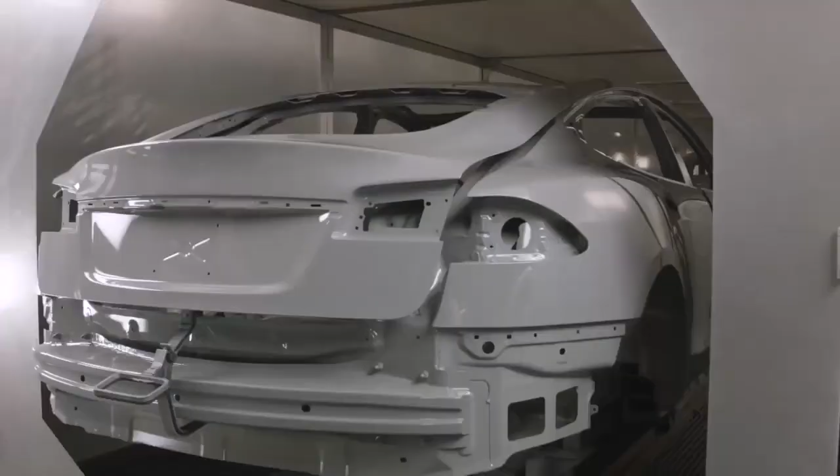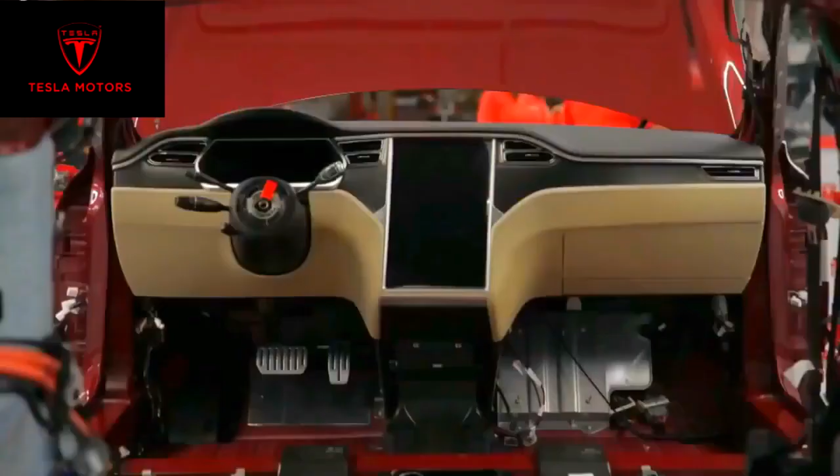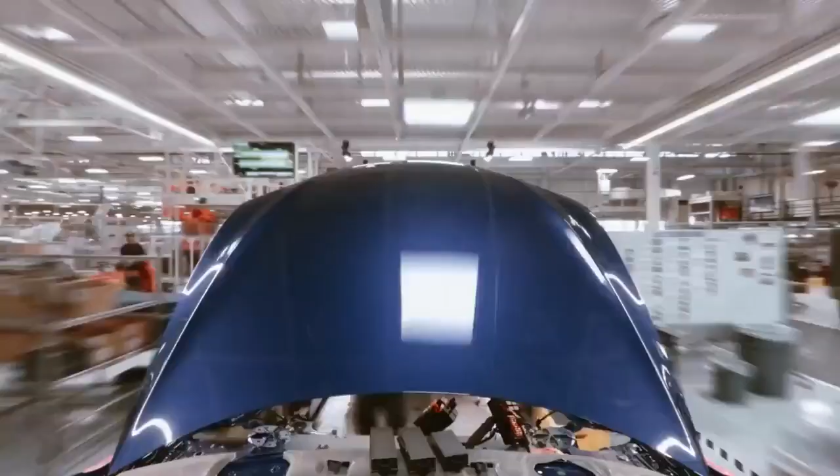Aluminium bodywork, 19-inch alloys, and a $50,000 price tag. At first glance, this car is the latest in a long line of high-end sedans. But that is where the similarities end.

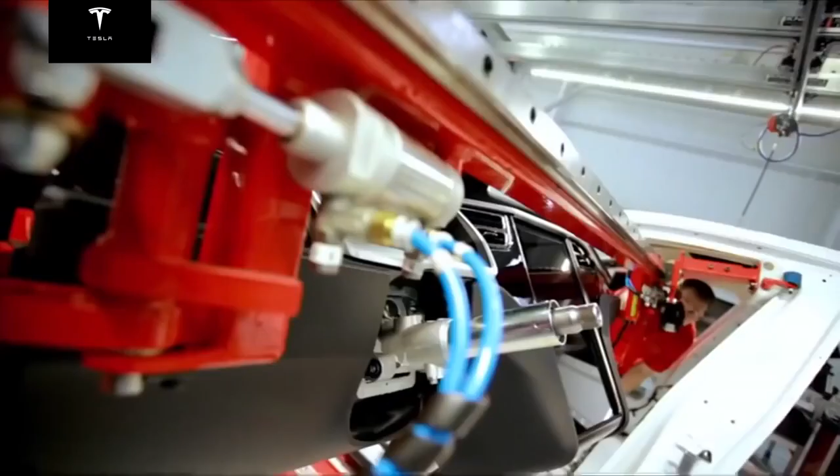The Model S is a totally different type of car. Tesla believe it can lead a revolution and change the face of motoring forever. It's the first ever mass-made premium sedan powered purely by electricity, designed to have speed and range, and not a drop of gas.

Our goal is to create an electric car that is the best car in the world and show that that's what an electric car can be. Tesla's goal is to kill off the combustion engine and prove the electric car has finally come of age. Driving a gasoline car is going to feel like yesterday. Driving this car is driving the future.

This is Elon Musk, Tesla's co-founder and CEO. Elon is an inventor and a maverick entrepreneur, one of America's youngest billionaires. I like exploring, I like technology, I like creating things that have never been seen before or even imagined before. He is a genuine Silicon Valley success story.

In the mid-1990s, Elon set up a small internet company. By 2002, he'd sold PayPal for $1.5 billion. Next, he founded private rocket company SpaceX. It's all part of Elon's life mission.

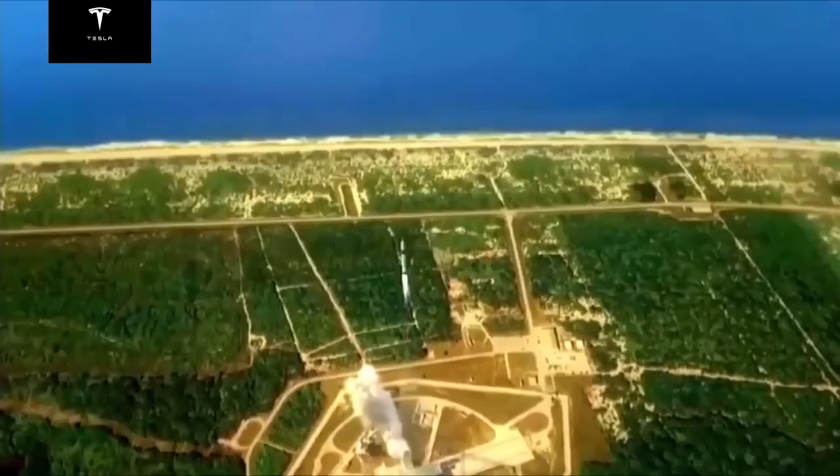When I was in college, I tried to think about, well, what are the areas that would most affect the future of humanity? So the three things were the internet, making life multiplanetary, and the third being sustainable energy. So that's what really ties together my companies, is that sort of thought from 20 years ago.

Tesla Motors is Elon's sustainable energy brainchild. Named after electric power pioneer Nikola Tesla, it's a car company that only makes totally electric vehicles. No hybrid and no alternative fuels. Absolutely no tailpipe. The company estimates their electric cars cause 50% less CO2, even if much of the electricity comes from a coal-powered plant.

It's technology Elon and co-founder J.B. Straubel believe we need. We're solving problems for our children, our grandchildren. Oil is a finite resource, and eventually we have to find alternatives. When you take that oil out of the ground and you burn it, it's extremely dangerous. We should not play Russian roulette with the atmosphere. We only got one.

Tesla's founders have a vision of a world without gasoline cars. They are convinced electric is not only cleaner, but better. Now, they want to prove it to the world. They believe their cars can trigger a transport revolution and bring electric motoring to the masses. What we're doing here at Tesla can have an amazing impact and revolutionize the auto industry and make every car on the road electric. That's our end goal.

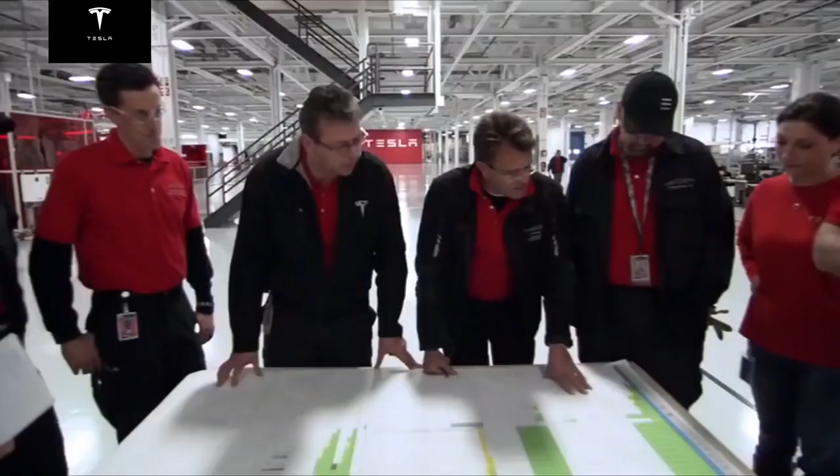Elon brings in Gilbert Passin as head of manufacturing. Gilbert is an expert from one of Toyota's award-winning plants in Canada. His description of my job to me was very simple. You know, you've got to create the best factory in the world with the best people in the world and make the best premium car sedan. And I said, okay, so where's the factory? Well, you have to find one. Where's the team? Well, you have to make one.

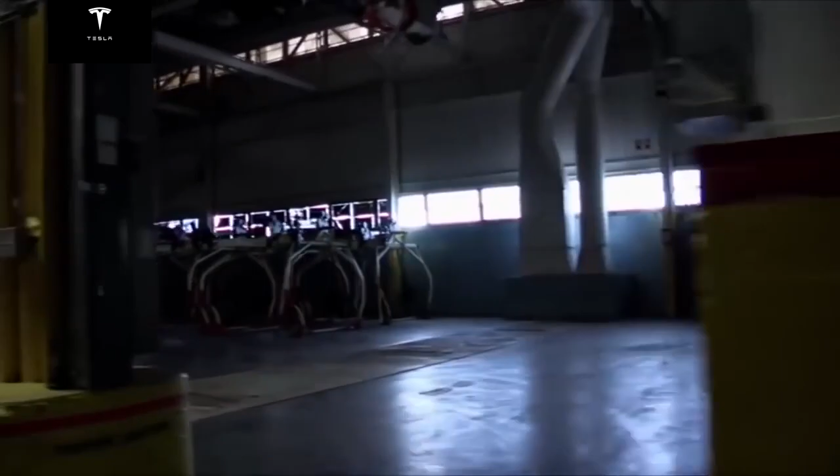The company purchased a former GM and Toyota site in Fremont, California, on the edge of Silicon Valley. The abandoned facility is a traditional car factory. Dark, little natural light, bare concrete floors. When Tesla Motors move in, it's the birth of a mega factory like no other.

It's a totally fresh approach to car manufacture. The walls and floors are painted white. The machinery a striking red. Skylights and windows flood the factory with sunlight. If you make the factory pristine and clean, that sets the tone for the vehicle. We want that same sense of quality and precision in the car itself.

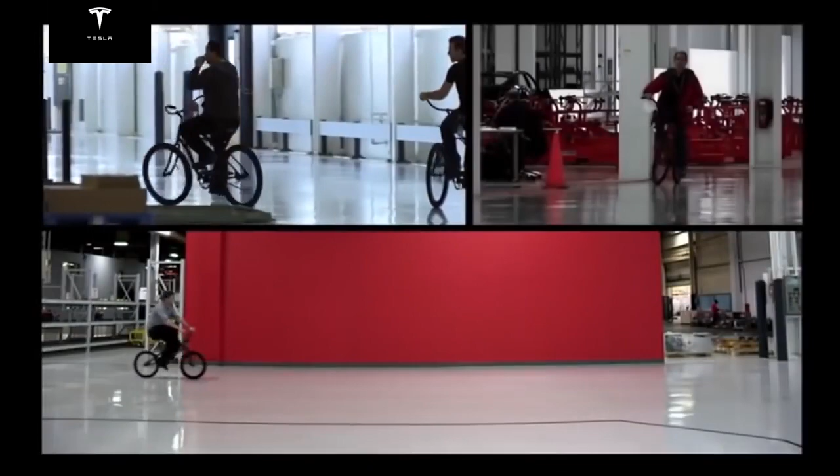As part of the whole company ethos, bikes are provided so the workers can get around the factory. I think it's important to have an environment where people look forward to coming to work. So it's worth putting some effort into making the factory beautiful. In true Silicon Valley style, they fill the space with the most advanced technology, creating an automated production line capable of building tens of thousands of cars.

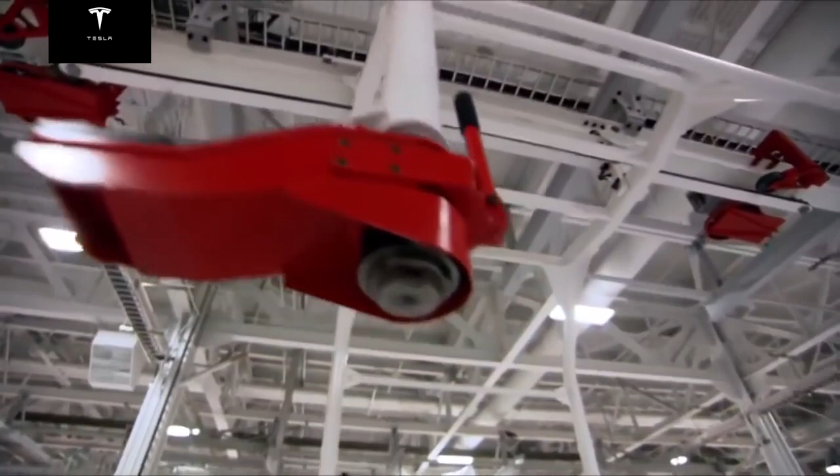Super efficient multitasking robots, self-guided smart carts, and computerized production schedulers. The factory is designed to be up there with the very best in the world. We love engineering, we love beautiful machines, we love new technology, we love to innovate with high technology. And also in manufacturing, we love to do that.

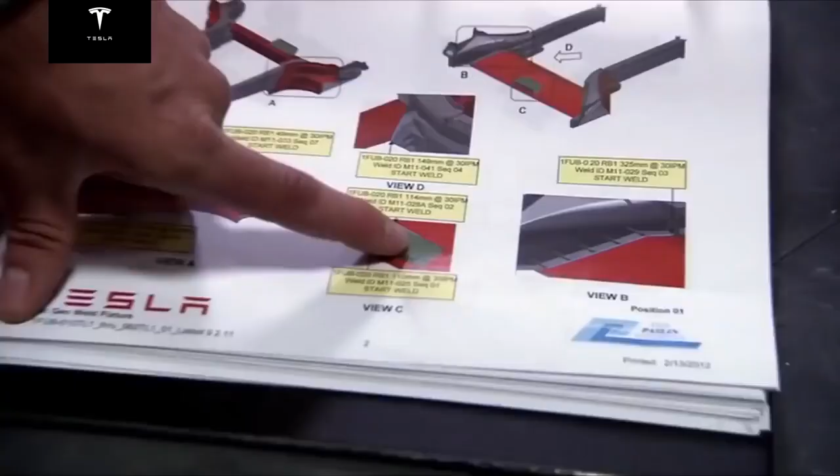Without training, these sophisticated robots are useless. They all need to be taught before they can run tasks automatically. Every robot is programmed by hand. The Tesla team has meticulously trained 130 sophisticated robots over a year and a half. One of the last robots still to be programmed is a multi-point welding robot. It will be used to join the car's underbody. These are pretty busy robots, so we got to make sure that our takt time is good.

A robot's work is only as good as the man who trains it. Brad Johnson is a welder with over 25 years' experience at the highest level. Getting this done today, we'll have the teachings all nice and smooth, and then we can start running 100% and full automatic. That sounds good. The space in which the robot operates is treated as a three-dimensional grid. The head can be manually guided to any point using a teach pendant.

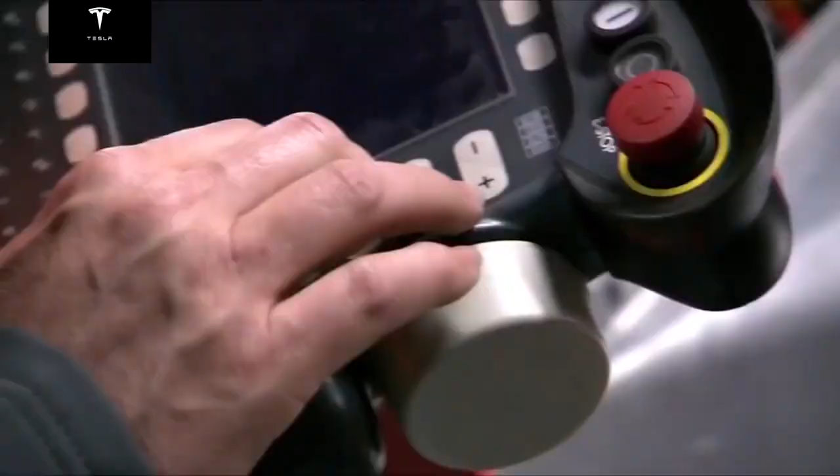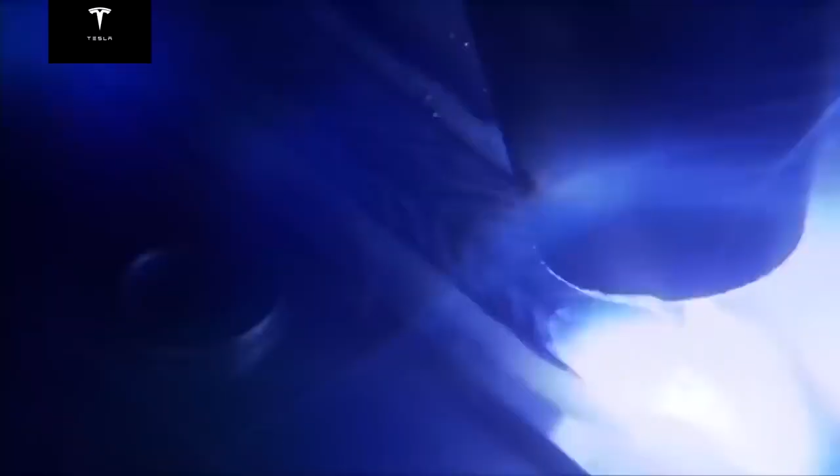There's our start point and our weld position. Brad guides the robot millimeter by millimeter and uploads the coordinates. The robot works out the most efficient route and runs the program. Looks like the teaching is right on mark, and we have a really good quality weld right here. So we should be able to run full auto with this weld. When full production begins, Brad's handiwork will be exactly replicated by the robot 100 times a day.

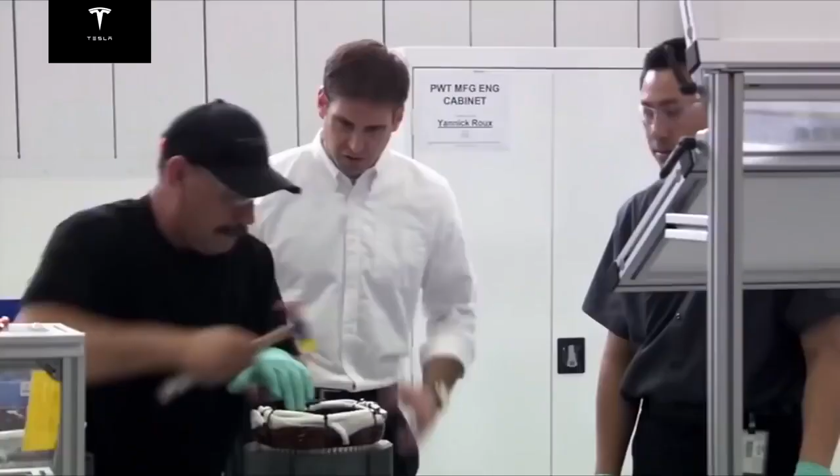Since their inception in 2003, Tesla Motors have been pursuing their electric car revolution with a step-by-step strategy. In an unconventional business move, Elon decreed that Tesla must invest in their reputation first and worry about profit later. Stage 1. Make a small number of high-value cars that prove electric power can be desirable. The Tesla master plan is very simple. We start off creating an expensive, low-volume car to help break the mold in electric vehicles.

Plan in place, they set to work on their first car, basing it around the British-built Lotus Elise. 5 years later, they released the Tesla Roadster. Quicker off the blocks than an Aston Martin Vantage, the electric sports car astonishes the motoring world. Step 1 complete in the Tesla strategy. What we showed was that an electric car could be sexy, it could be fast, and it could be long range. And that if you produce such a car, that people would buy it. But as a $100,000 two-seat sports car, it's a luxury second vehicle to most of its owners.

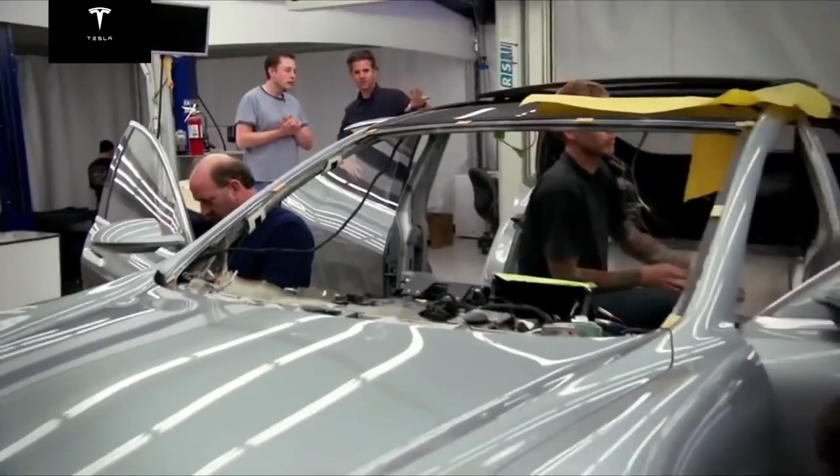Time for the pivotal Stage 2 in the master plan. A car that costs half as much and sells in much bigger numbers. A very important step in the Tesla strategy is really going to show that a mainstream electric car can be better than a gasoline car. The Model S is the second step in Elon Musk's vision of an electric revolution. A premium mass-market sedan designed and built from the ground up by Tesla.

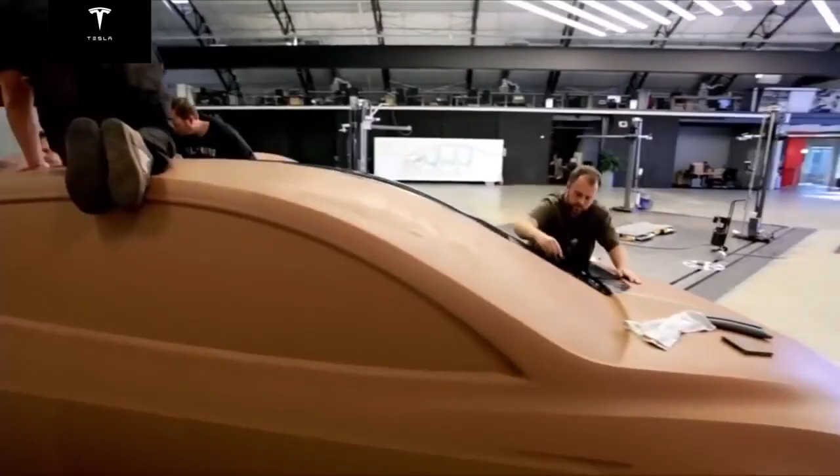At the studio in Los Angeles, they are working to craft that car. The Model S is really the foundation of Tesla. It's the first true product designed, engineered, built, manufactured by Tesla. And it's really the beginning of what our mission is about. Franz von Holzhausen is the chief designer.

He believes Tesla's design needs to have some conventional appeal. It's really easy to have a clean slate and go pretty crazy with that. We had to start with something that people could relate to. If they even knew or cared that it was an electric vehicle, they were attracted to it.

We've stretched the sedan and made it a little bit more modern, but it's still a sedan. It still has this somewhat traditional cue, and so it's easy to love because of that association. Although uniform in appearance, the Model S is a unique car. It was conceived as electric. Even the shape is designed to maximize the battery's range.

The body and the waist here is all slim, so there's no excess fat or body mass on this car. And that's another one of those elements that just translates into great efficiency. This car is one of the most aerodynamic sedans on the market. In an electric car, conserving the battery power is so important. The designers put huge efforts into reducing the drag. Even the door handles are aerodynamic, receding flush into the body.

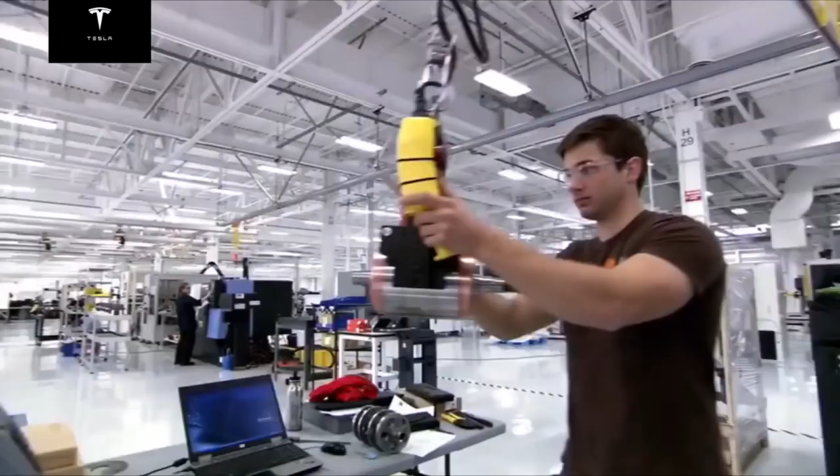But it's the interior that is most heavily influenced by the electric powertrain. The powertrain is incredibly small. You get the same performance out of a motor that's the size of a watermelon that fits between the rear wheels. And everything else above that is what I call the opportunity space. The design team started with the motor and flat battery pack and worked upwards.

With the motor next to the wheels, there's no need for a drive shaft, so there is no rise under the rear middle seat. There is no fuel tank or transmission. The Model S has free space from the floor upwards. What you'll see is a vast amount of space. In fact, it's actually so big that we decided that we could fit 7 people, and we do that by putting 2 rear-facing child seats in the back here. And you can see where they fit here, and their legs go right down in there.

So this is what we call the Frunk, and it's really the trunk in the front of the car. And arguably, you can put a whole bunch of stuff in here, even when the back of the car is totally loaded up with people and kids and stuff. And who doesn't need one of these?

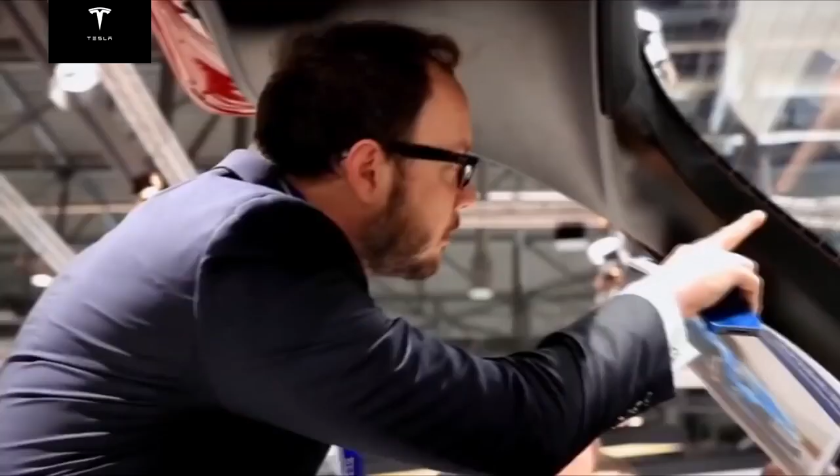The financial boost also creates real pressure. I get harassed quite a bit actually by some people who have reservations, and it's a lot of expectations, very high expectations that we're going to have to meet and exceed, really. Some prepaid customers have been waiting up to 3 years for their car. In return, they've been promised a delivery deadline. I do feel an incredibly strong obligation to those that have placed their faith in Tesla and put down deposits. I'll do anything to make sure that their faith is not misplaced.

The delivery deadline for the first cars is now only 2 months away. But the brand new factory hasn't built a production car yet. If the customers are to get their Model S on time, the facility urgently needs to start manufacturing. The speed at which we have to work here is extremely important to the company's bottom line. This is a kind of timing that is really, really challenging on many, many different accounts.

Tesla need to build 20,000 cars a year. But before mass production can begin, Gilbert and his team must prove the factory is ready. The company is relying on them to get it right. We have to make sure that car after car, the quality is there, everything is perfect along the way. So we are really gearing up towards a production ramp-up. Over the next few weeks, the factory will test manufacture a limited number of Model S.

If the line doesn't perform with these cars, the company will be forced to miss their deadline. Tesla's electric revolution would be over before it started. A very, very important moment is the birth of Model S in our Tesla factory. And it's where the rubber is going to meet the road, so to speak. The process begins in stamping.

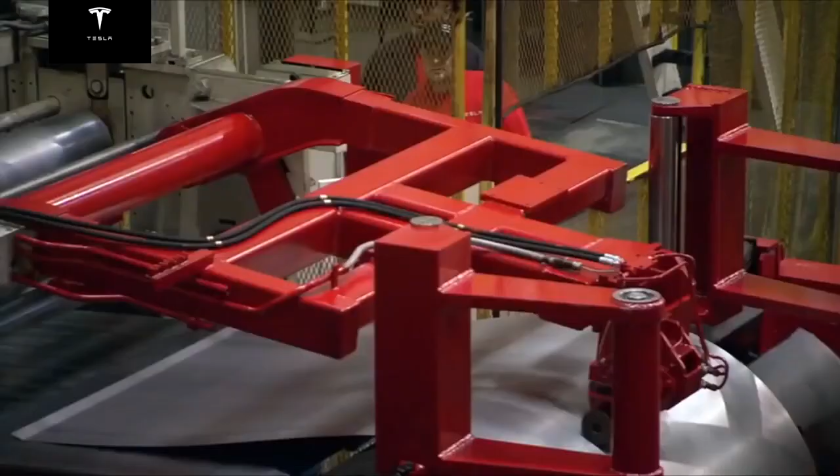To increase the battery's range, the company have decided to build 97% of the Model S with lightweight aluminium. It's an extremely rare feature in a mass production car due to the cost. Every Model S starts as one of these. The roll is loaded into the mechanical cutting machine.

Once cut, the panels are passed to the stamping press. We need to translate flat pieces of aluminum into 3D forms. And how to do this with aluminum stamping with the level of quality that we expect is really, really challenging.

To meet the challenge, they buy the largest available stamping press in North America. It's one of the first pieces of equipment they install. Over 3 stories high, it has to be transported from Detroit on 70 trucks and then entirely rebuilt.

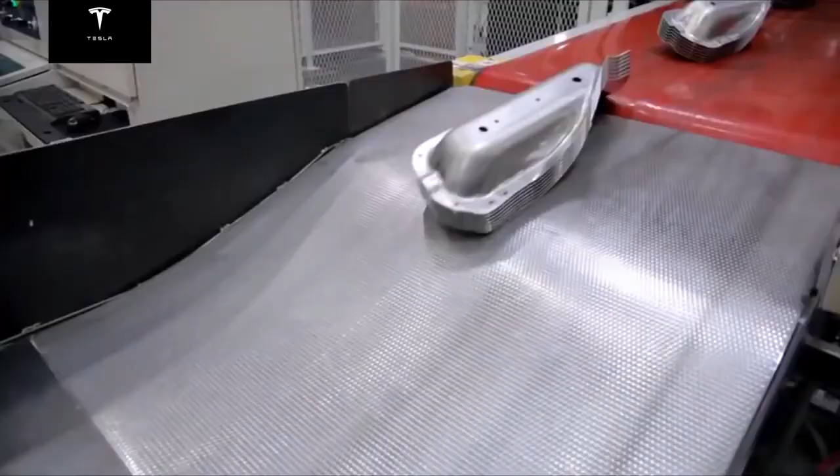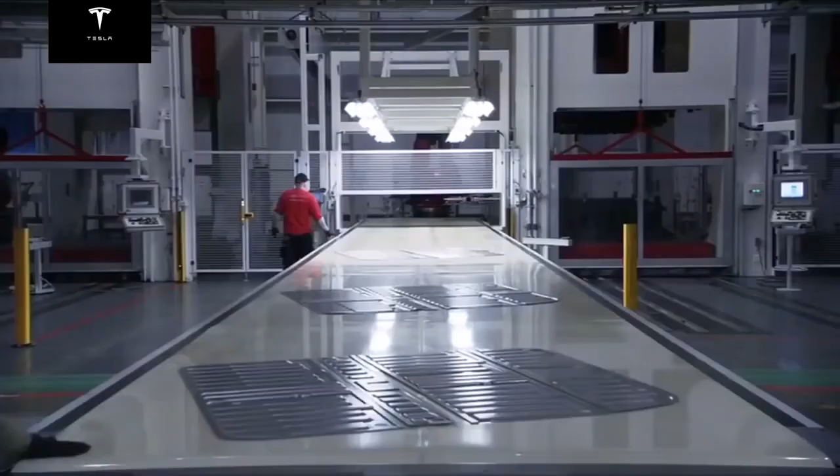The immense pressure from the stamp allows them to press the complex body shapes needed for the Model S. It can be mounted with different heads, known as dies, that mold the panels into a wide variety of shapes. Robotic arms feed the 4 stages. Each stage forces a more detailed 3D shape, producing stacks of floor plates.

These lightweight aluminium parts improve the Model S's power-to-weight ratio, which helps increase the performance and range. The 2 things that obsess co-founder and technical chief, J.B. Straubel. Any ideas on how we can make it better? Performance and range were the 2 big issues that needed to be improved, and that's where we've put most of our focus on the technology and powertrain.

Powertrain manufacture, 2nd floor. This is where they build the heart of the Model S, the motors and battery packs. Tesla know the electric powertrain will define their cars, so they push to advance the technology themselves. This is an extremely exciting field where inventions continue to happen even faster than they did in the years previous.

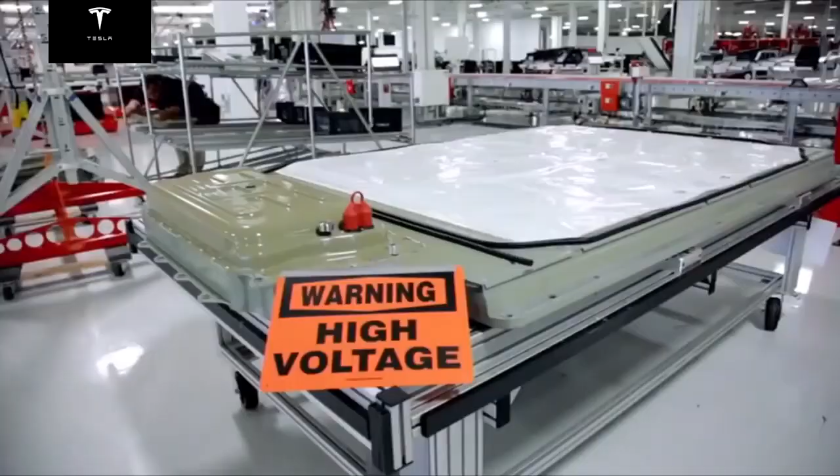Tesla's solution to improving battery life appears startlingly simple. They use thousands of small lithium-ion cells, similar to laptop batteries. Thanks to these regular batteries, the company say the Model S has achieved a top range of 480 kilometers. Once you have 250 to 300 miles of range, then you're in a different usage mode. You're in a range that is equivalent to most gasoline cars.

The car can be charged by 100 kilometers every hour from a regular power outlet. Ultimately, Tesla are hoping to install superchargers along major highways that can charge the car to capacity in 45 minutes. You can charge the car up every night, but you don't need to. You can actually charge it once a week.

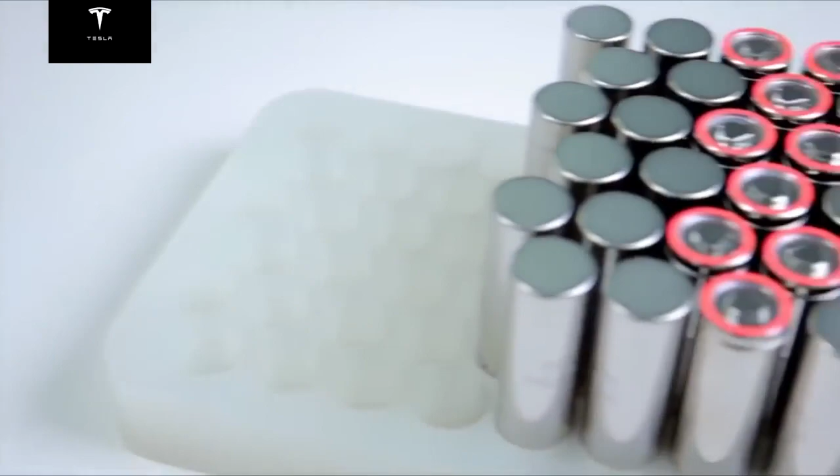The high-performance battery pack is formed with over 7,000 small cells. They're organized into a flat layer with specific groupings of positive and negative. The final layout is the key to the pack's power and range, and Tesla considers it absolutely top secret.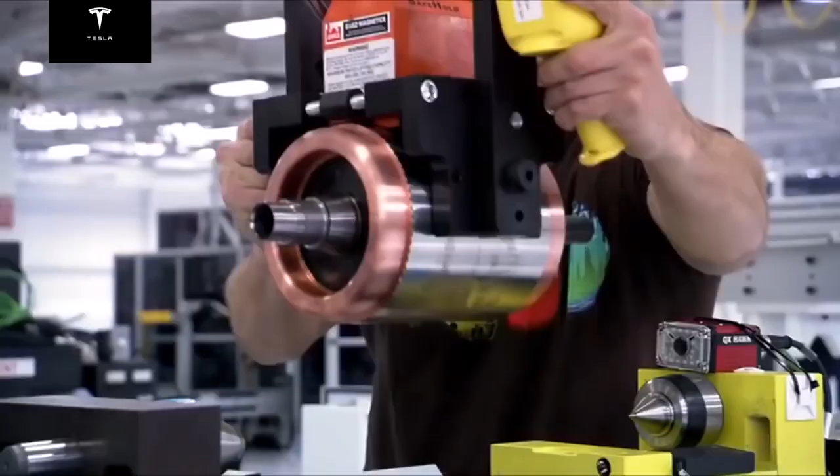The motor unit is also developed in-house. It's essentially an AC induction motor, a concept invented by 19th century scientist and Tesla Motors namesake, Nikola Tesla. He harnessed an electromagnetic field to turn a basic motor. Modern-day Tesla has developed their motor with a highly conductive copper cylinder. When the electromagnetic casing is fed with current, the copper cylinder inside starts to spin.

It's nearly 3 times more efficient than a combustion engine. In fact, there are only 3 moving parts. It connects directly to the rear wheels and doesn't need a transmission. These are the 3 moving parts in the whole Model S powertrain. One of the cool things also with this very simple gearbox is that when we want to go in reverse in the car and back up, all we have to do is spin the motor in the other direction, and the car backs up. We don't need a clutch, we don't need a separate gear for reverse.

The entire drive unit is under a meter long, smaller than a golf bag. But it propels the Model S, a family-size sedan, into the class of performance cars. In fact, this powertrain creates a totally different driving experience. Program Director Jerome Guillem works constantly to refine it.

As with the light switch, electric power can be fully applied instantly. The first thing that's gonna surprise people is how much torque you get so quickly. That response, instant response. You cannot really mess with the throttle too much because if you push on it, then the car will go.

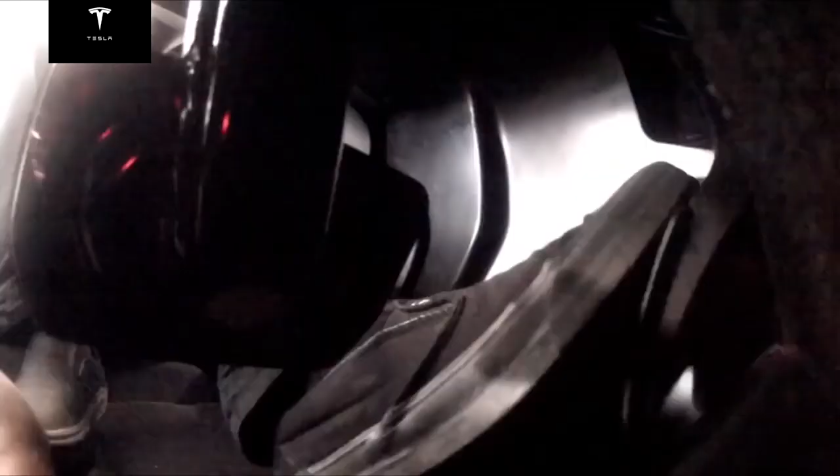But the real evolution in the way you drive is down to one of the central innovations in electric cars: regenerative braking. Although the Model S has traditional brakes, you don't have to use them. Regen braking can be engaged by simply easing off on the accelerator. When you want to brake, you just take your foot off the pedal, like I'm doing now, and the car brakes itself. So you don't need to use the mechanical brakes.

When active, the regen system magnetically resists the motor's rotation, slowing the car and harvesting electric current. The energy recovered recharges the battery and extends the range of the car. When you put your foot down again, the electric power returns. Tesla call it one-pedal driving. It's a little bit different approach of driving, but once you realize that if you take your foot off the pedal, the car slows down, then it's like, whoa, this is great. I can drive using only one pedal.

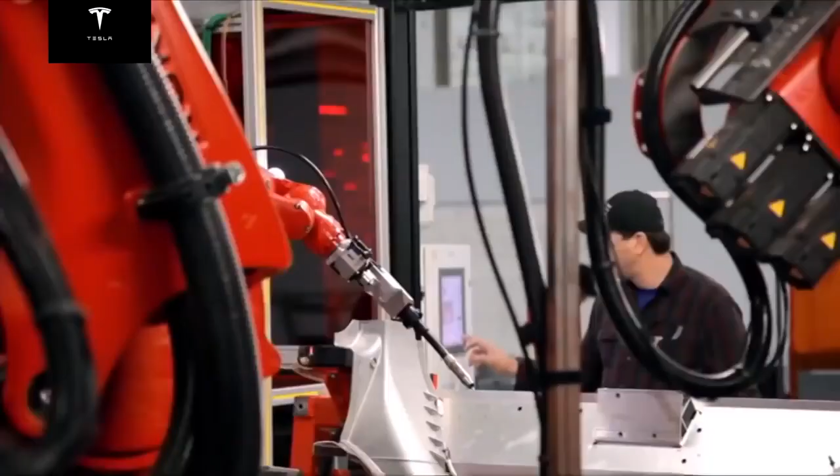Under observation, it's a tense time for the team. The robots work in a tightly coordinated chain. The second phase hits an issue. It shuts the whole process down.

With the deadline looming, Elon Musk is determined to keep Tesla's waiting customers happy. He's organized a Model S test drive event for the people who've placed deposits. The test ride will go out onto Jack Northrop Avenue, so you'll get a chance to see that this isn't some show car that doesn't actually do what it says. It will go fast and with a lot of people in it. And quiet. And quietly, yeah.

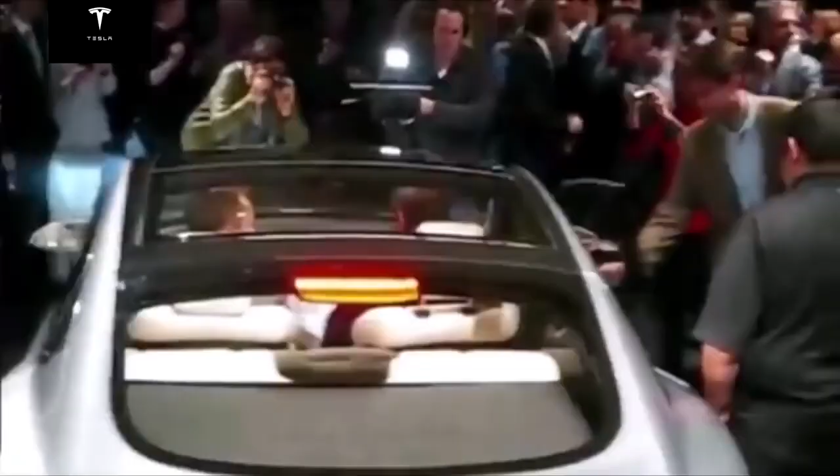Many have prepaid years ago, and it's their first time inside a drivable Model S. Customer and board member Steve Jurvetson captures his experience on his mobile phone. Wow, this is insanely cool. It's a surreal scene. It's way cooler than I can imagine. You really decked this out. Yeah, it's nice. The first ride has to be documented here.

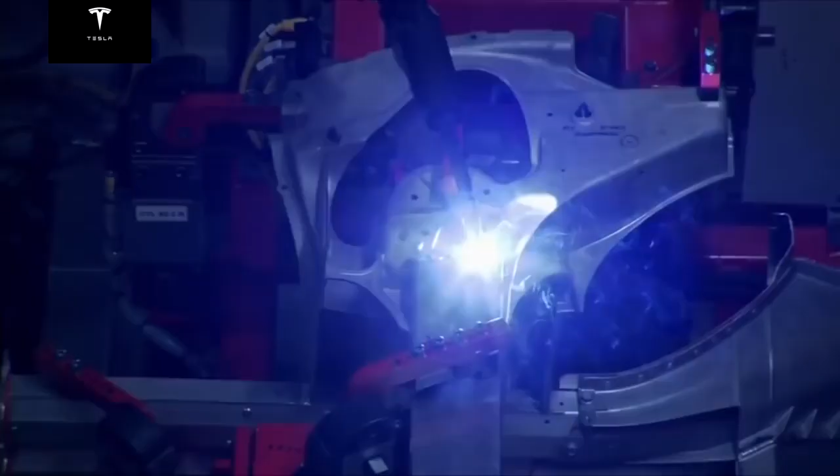A major delay will disrupt the whole production schedule and threaten the deadline. They adjust the settings and set the robots in motion again. This time, it goes off without a hitch. Approved for mass production. The run through the automated line reaches the Model S exterior. The Model S body is made up of 14 different sections. To speed the workflow, Tesla construct each section at separate sub-assemblies.

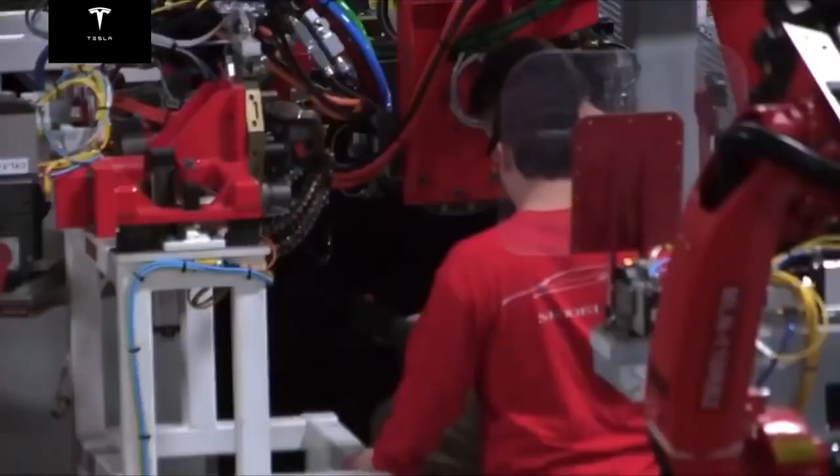Door sub-assembly. The internal frame is joined to the exterior panel. As the robot's pincers come together, they fire a rivet and join the aluminium sheets. Over to the right, side body sub-assembly. One of the most advanced aspects of Tesla's robots is that each arm can perform a variety of different tasks. We have to use all the gamut of technology to make the aluminum joint between stamping and welding and riveting and bonding and all these things using robots that are multitasking.

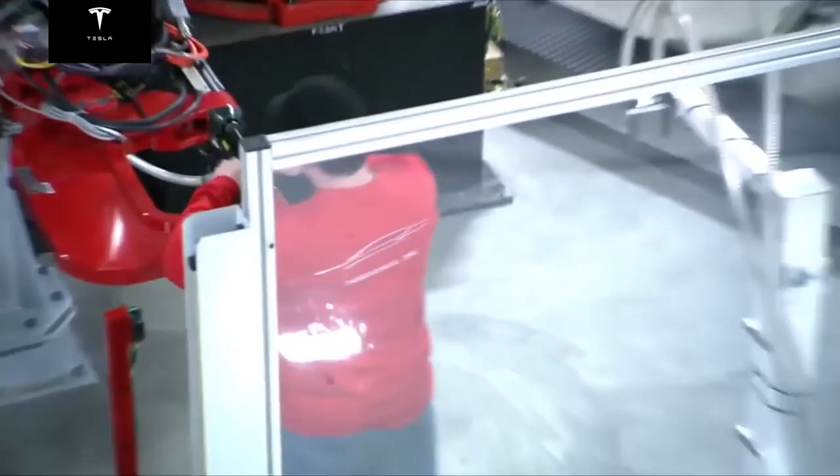This flexibility is essential for a compact and efficient workflow. A robot can spot weld using a pincer tool and then automatically detach the pincer and pick up a clamp tool. The same arm that joined the panels can now move it to the next station. It's clever, but tricky and needs constant refining. When you draw something yourself, you take a pencil, you take an eraser with the same hand, right? And then you change the tool, so to speak. Same thing here.

Once assembled, the sections are brought together at body assembly. Here, they're riveted around the welded underbody to form the basic shell of the car. All the sections are lined up alongside the central framing line. Gradually, the automated line builds up the side sections, ready to house the doors.

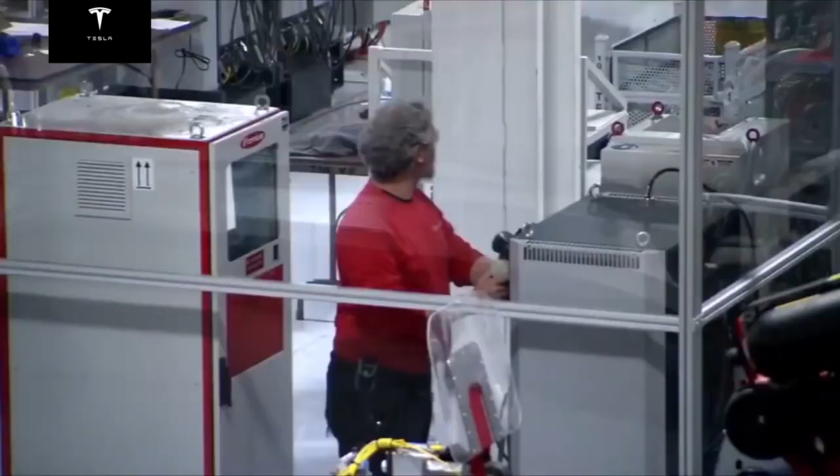A test batch of 3 cars is complete. Body assembly has demonstrated it can run successfully in full automation. It's a vital milestone in the countdown to mass production. Completely assembled, the aluminium body is now known as body in white. It's ready for some colour. The body in white is loaded onto an overhead train that carries it to the paint area.

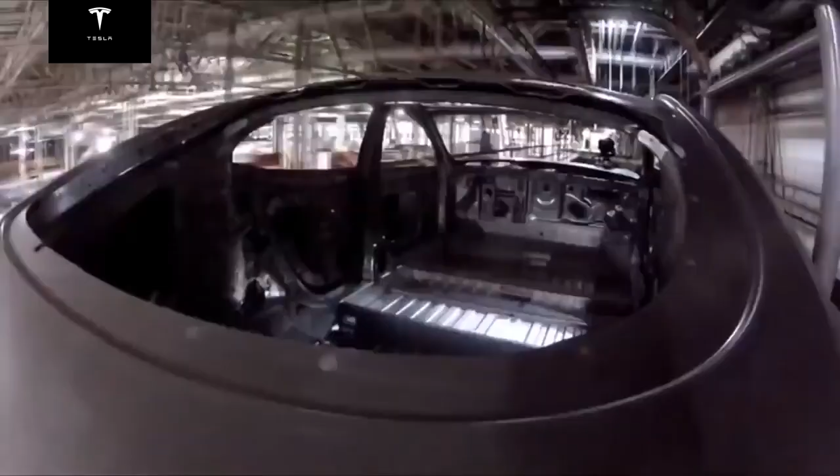At this vast facility, the paint centre is in a totally separate building. The Fremont site covers nearly 95 football fields of space. It's so big, the Model S production line only fills 20% of it. The extra space is the cornerstone of Tesla's grand strategy for an electric revolution.

The Tesla factory is huge. It's about 5 million square feet on 2 levels. Right now we are only utilizing a small fraction of the space, but most of it, as you can see behind me, is what we call the dark side. It's sort of dark and not utilized yet, even though we have a lot of plans for the future on how to fully utilize this entire building.

These expanses are an integral part of the company's stage-by-stage building plan. They want to fill the space with a production line for a further range of Tesla vehicles. A very high-volume, economy-priced model, the Stage 3 car. In the future, we intend to expand our range of vehicles, maybe of a smaller size and also more affordable for the market. And this factory is ideal, and we are going to make this a super mega factory.

Long term, Fremont is meant to produce the low-cost Stage 3 electric car in the millions. It's the final step in Elon Musk's Tesla master plan. To really have widespread adoption of electric cars, we have our 3rd generation vehicle, which would be a low-price, high-volume vehicle, and that's really what's going to fill out the rest of this humongous factory. I'd love to bring this to 500,000 vehicles a year as soon as we can. The future of Elon's strategy first depends on the success of the Model S.

In production, the time to the delivery deadline is now running low. The aluminium body arrives on the overhead train from Body Center. Paint Center. This is where they make the car look like a premium sedan. It's a state-of-the-art process. There's a lot of technology that goes into the Tesla car, but the very first thing they'll tell you is what color of Tesla car they bought. That's how important the paint is.

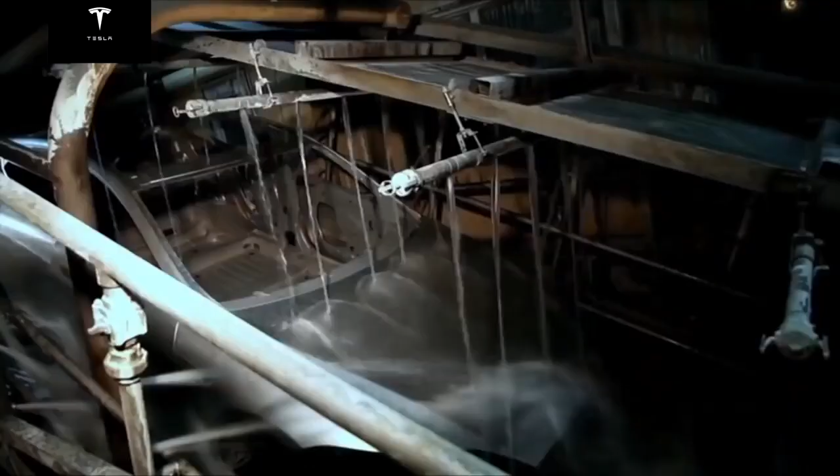First, a roller coaster ride of treatment baths. Detergent to clean the surface, and then electrocoating. The electrocoat helps attract the paint to the aluminium. The primed car is ready for colour. This vehicle will be sprayed with their trademark tint, what Tesla calls signature red. It's a color that we developed that's different than anybody else's red. It's been developed with glass flake to get the specific type of sparkle that...

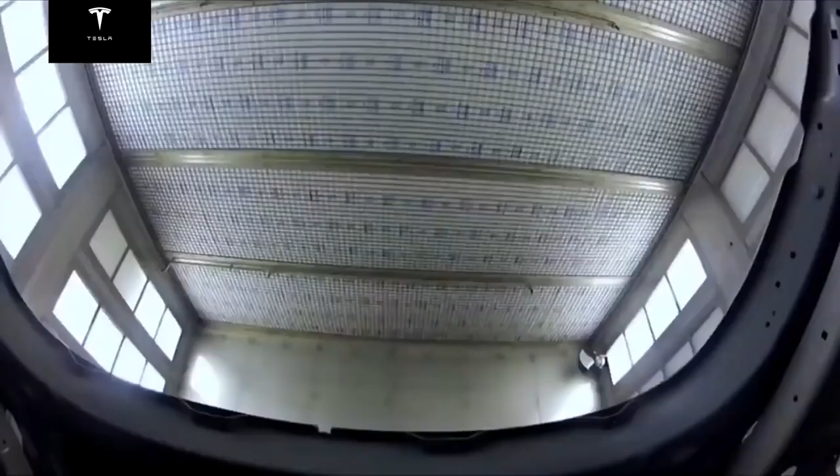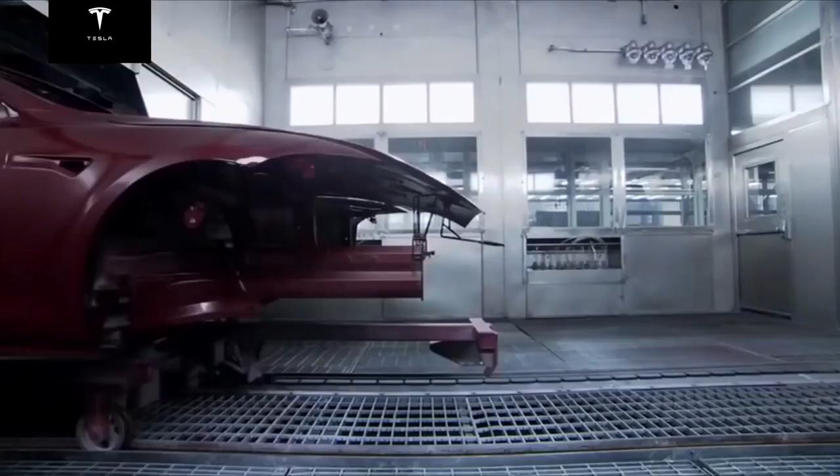Aluminium bodywork, 19-inch alloys, and a $50,000 price tag. At first glance, this car is the latest in a long line of high-end sedans. But that is where the similarities end. The Model S is a totally different type of car. Tesla believe it can lead a revolution and change the face of motoring forever.

It's the first ever mass-made premium sedan powered purely by electricity. Designed to have speed and range, and not a drop of gas. Our goal is to create an electric car that is the best car in the world and show that that's what an electric car can be. Tesla's goal is to kill off the combustion engine and prove the electric car has finally come of age. Driving a gasoline car is going to feel like yesterday. Driving this car is driving the future.

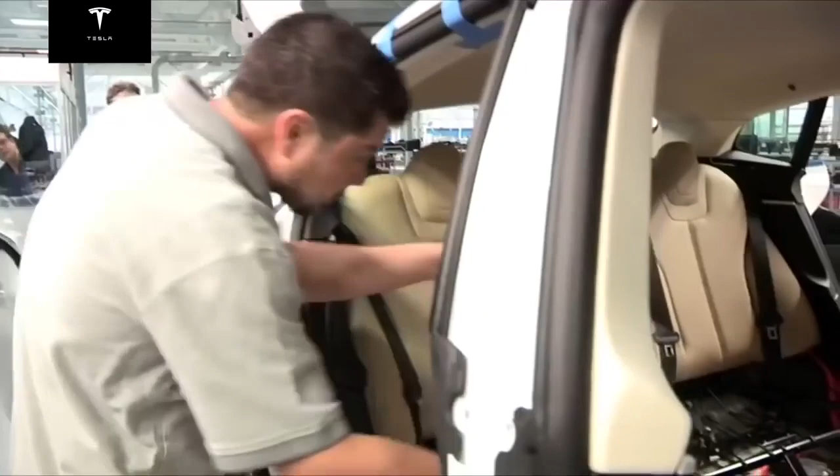The Model S carries a touchscreen tablet inspired by Tesla's Silicon Valley neighbors. Tesla is very much a Silicon Valley company that has a Silicon Valley operating system, which is similar to a Google or Facebook or Apple, joined together with a tremendous amount of great automotive expertise. It's about bringing the things that we're used to, our phones, our computers, and the interaction that we have with them into the car.

The car has a mobile 3G internet connection. The driver can download software upgrades and customize the display. The car's always connected to the internet, so we can understand your calendar, and we can know that you're going to work at 8 a.m. on Monday, and the car can be warmed up for that experience.

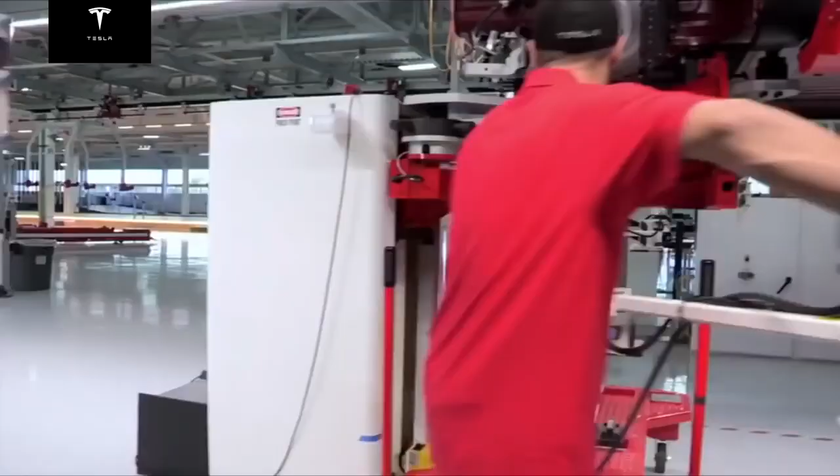At the factory, the start date for mass production is now only 2 weeks away. The first batch of test vehicles reaches the vital final stages, powertrain and body marriage. In gasoline cars, installing the drivetrain is a lengthy process. With electric, it can happen in just 2 steps. Step 1. The motor unit, complete with suspension and brakes, is bolted into the rear wheel berths. There is no drive shaft or transmission to be attached. In one motion, it's fitted.

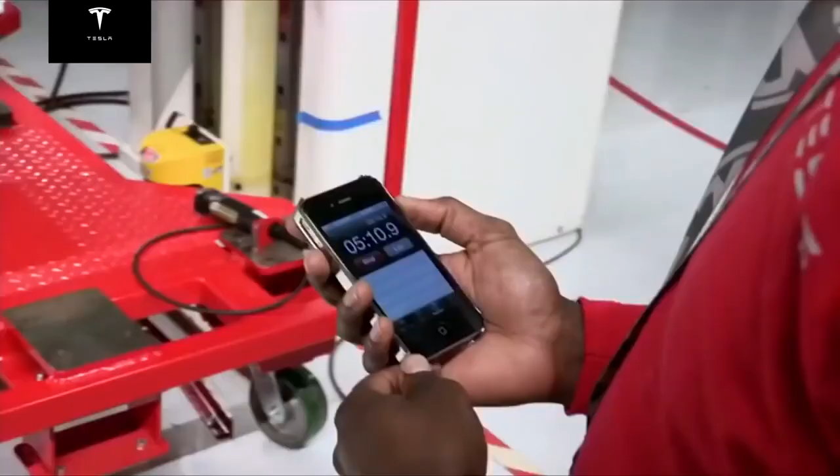For final assembly, the work is mainly manual. Like the robots, the line workers' performance is being monitored. 509, guys. With every vehicle, they're ramping up to the full production cycle time, or takt time. Every station here in the factory has to achieve a certain operation in that takt time in order to get it to our customer on time. Here, the target is 4 minutes and 42 seconds.

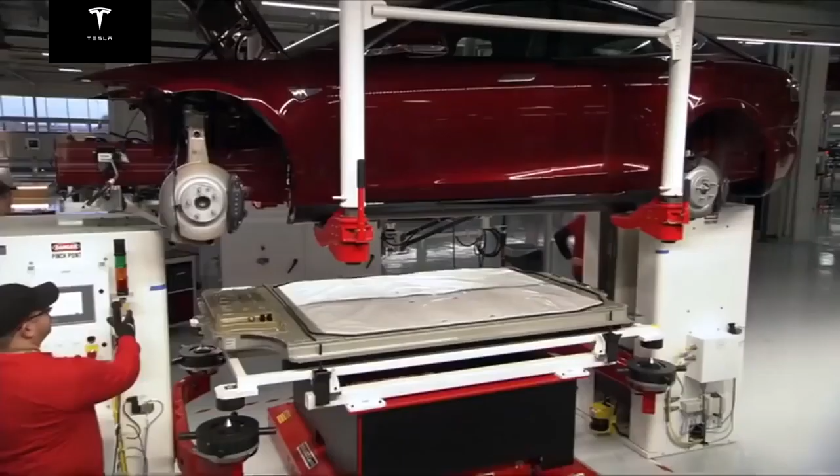Throughout the build, every single time you may hear me in the background saying, we're at 2 minutes, we're at 5 minutes, right? So they can know exactly where they are when we're shooting to get to that 4 minutes and 42 seconds. Step 2, battery pack installation. The pack's steel case acts as the car's chassis. Bolted into place, it gives the Model S its rigidity.

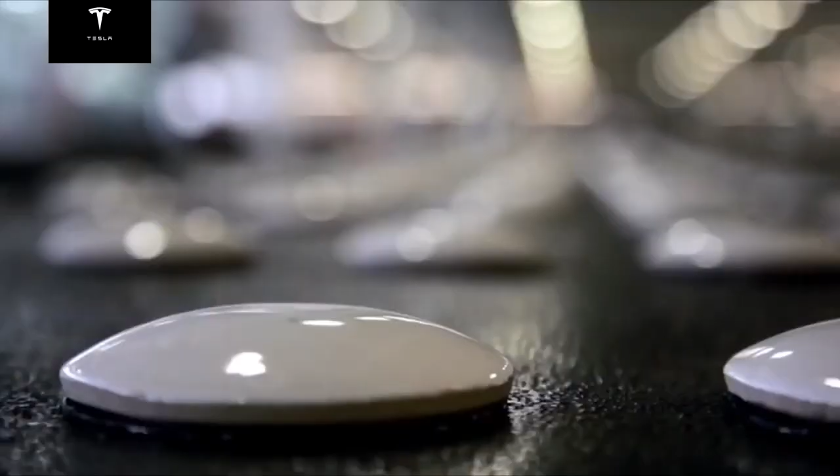A stage along, the first complete cars arrive at final inspection. At Elon's insistence, inspection happens on a bamboo platform. He believes you can only judge a car's beauty if it's framed by beautiful surroundings. The last check is the test drive. At Tesla, the track is very different. Because electric cars produce no exhaust fumes, they can be driven indoors.

Our people have done so well at putting this car together. You can see the remarkable quality of the paint and the entire vehicle, the body fit and everything. I'm so proud today. This is the first Model S to pass through the production test run. And its quality proves the new mega factory is ready for mass production. It's a big moment for the company.

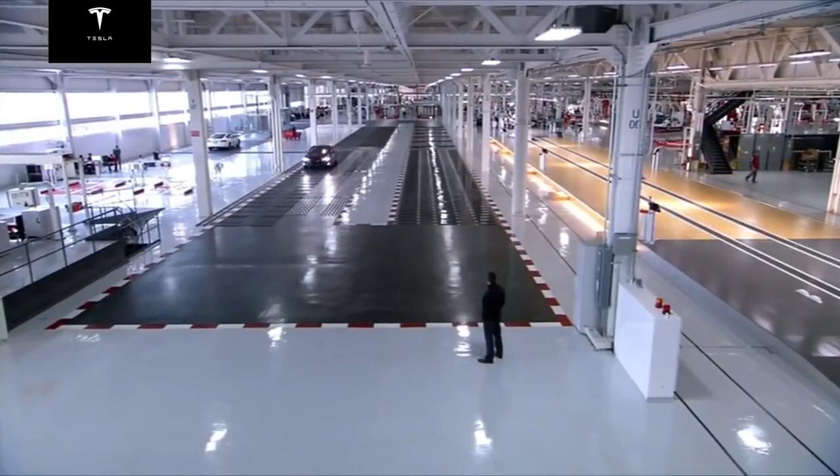Just to see this car going around the test track here, it really demonstrates the fact that the Tesla factory is ready to go. I just have to make 20,000 per year more of this kind, and it's sort of a done deal. We just have to get it done. The factory can now push towards the delivery deadline, allowing Tesla to pursue their strategy for an electric car revolution. Can you imagine if all the cars in the world were able to have zero emission, zero noise, and we could do that in a perfectly clean environment? That would be so cool.

This is Tesla's vision of an all-electric future. No fumes or heat. No noise or dirt. No expensive gasoline. Just clean and quiet streets. It's truly impressive to see how we are really day by day and person by person changing people's thinking about what electric vehicles are versus what we've all grown up and taken for granted. If we can do that through one product, that's unbelievable. 10 years from now, Tesla will change the perception of what mainstream cars can be. And it'll become clear